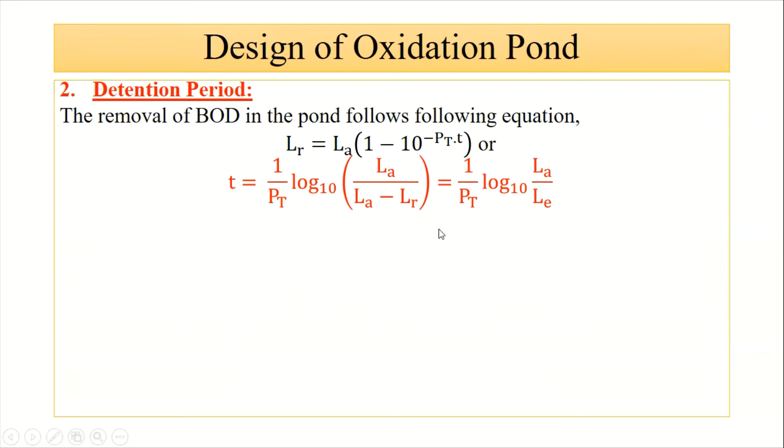So, design of oxidation pond. The second is the detention period. The removal of BOD in the pond follows the following equation. So this is the equation: LR is equal to LA into (1 minus 10 raised to minus PT into T), or T is equal to 1 divided by PT log10 (LA divided by (LA minus LR)), which is equal to 1 divided by PT log10 (LA divided by LE).

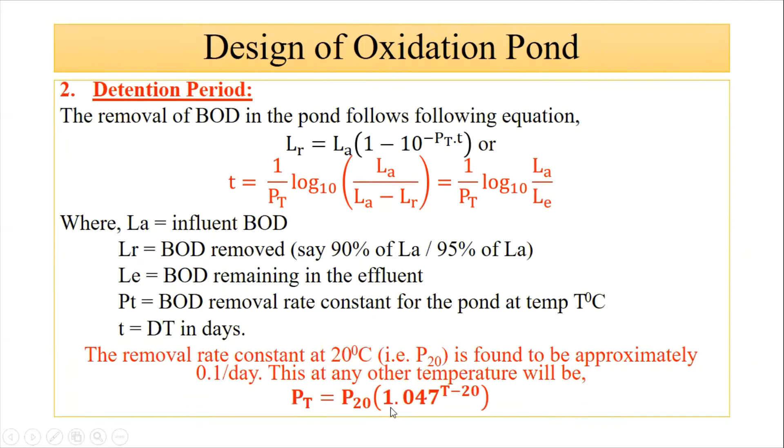Where LA is the influent BOD, LR is the BOD removal, say 90% to 95% of LA, LE is the BOD remaining in the effluent, PT is the BOD removal rate constant for the pond at temperature T degree Celsius, and T is the detention time in days. The removal rate constant at 20 degrees, that is P20, is found to be approximately 0.1 per day. At any other temperature it will follow the formula PT is equal to P20 into 1.047 raised to (T minus 20).

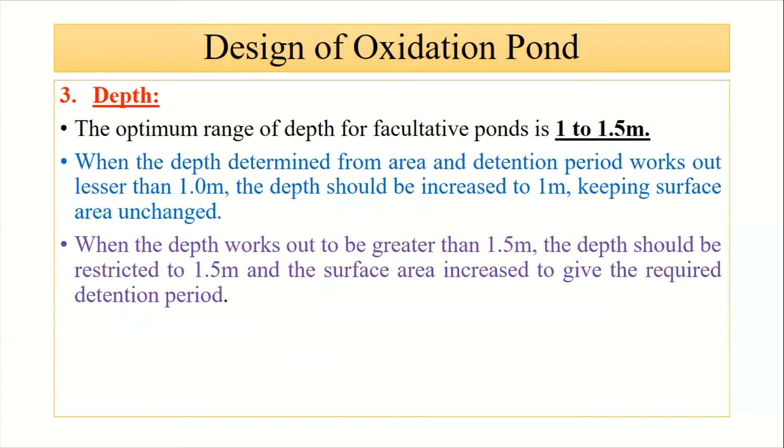So next is the depth. The optimum range of depth for a facultative pond is considered 1 to 1.5 meter. When the depth determined from surface area and detention period works out lesser than 1 meter, the depth should be increased to 1 meter, keeping surface area unchanged. When the depth works out to be greater than 1.5 meter, the depth should be restricted to 1.5 meter and the surface area increased to give the required detention period.

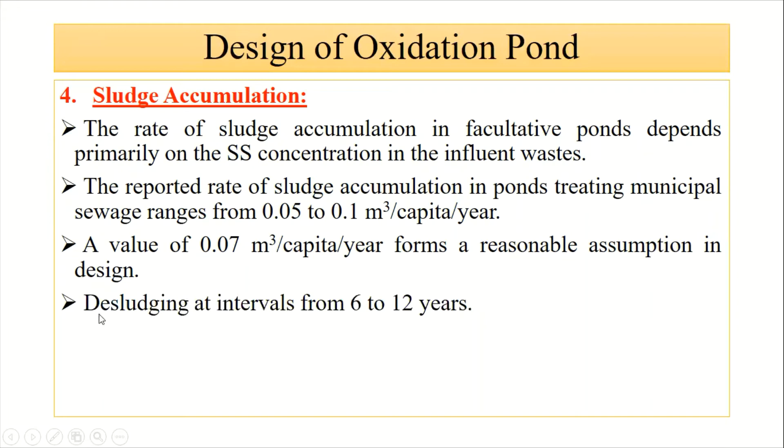Then next, sludge accumulation. The rate of sludge accumulation in a facultative pond depends primarily on the suspended solids concentration in the influent waste. The reported rate of sludge accumulation in ponds treating municipal sewage ranges from 0.05 to 0.1 meter cube per capita per year. A value of 0.07 meter cube per capita per year forms a reasonable assumption in the design, with desludging at intervals from 6 to 12 years.

So next, number of units. Multiple units are required to be provided when the area exceeds 0.5 hectare. These units can be either in series or parallel. A multiple system in parallel provides better distribution of settled solids. Multiple cells in series enable better coliform removal and reduce algae concentration in the effluent.

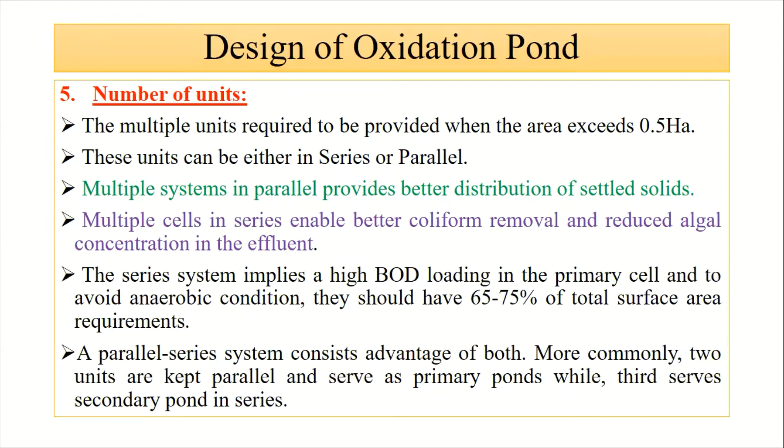The series system implies a high BOD loading in the primary cell, and to avoid anaerobic conditions, it should have 65 to 75% of the total surface area requirement. A parallel-series system combines the advantages of both. More commonly, two units are kept in parallel and serve as primary ponds, while a third serves as a secondary pond in series.

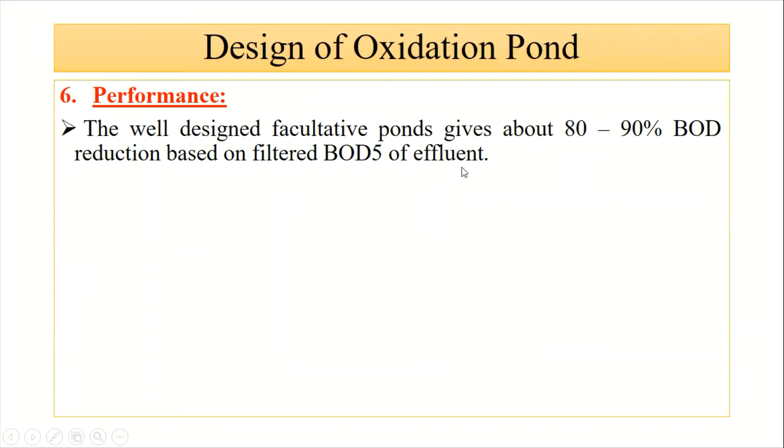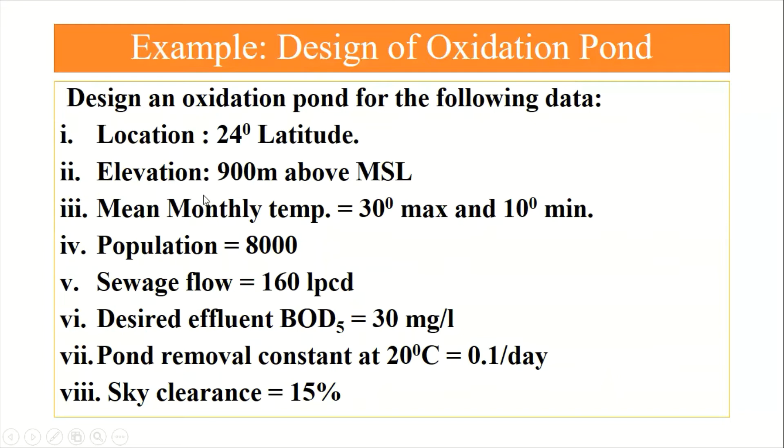Then performance. A well-designed facultative pond gives about 80 to 90% BOD removal based on filtered 5-day BOD of the effluent. So the next point is the design of an oxidation pond for the following data. The data gives location, elevation, mean monthly temperature, population, sewage flow, desired effluent BOD5, and pond removal constant at 20 degrees Celsius equal to 0.1 per day. Sky clearance is 15%. The location is 24 degree latitude, elevation 900 meter above mean sea level.

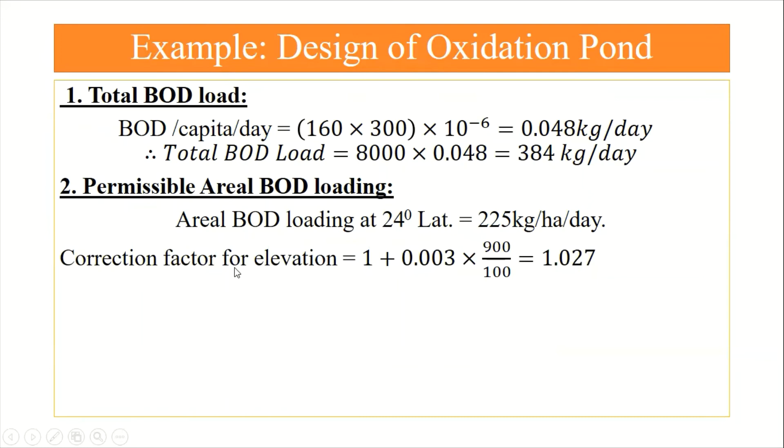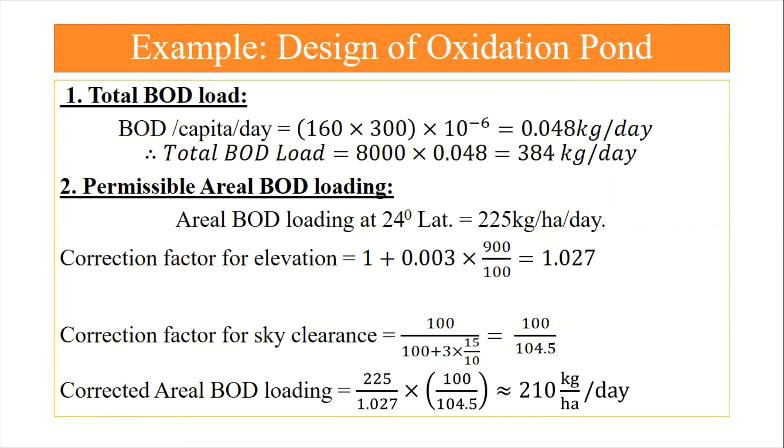Then the correction factor for sky clearance is 100 divided by (100 plus 3 into 15 divided by 10), equal to 100 divided by 104.5. Then the corrected areal BOD loading is 225 divided by 1.027 into 100 divided by 104.5, nearly equal to 210 kg per hectare per day. Then pond area: the pond area is the total applied BOD5 divided by areal BOD loading. The total applied BOD is 384 and areal BOD loading is 210, so nearly 1.83 hectare. Converting into meter square, 1.83 into 10 raised to 4 meter square.

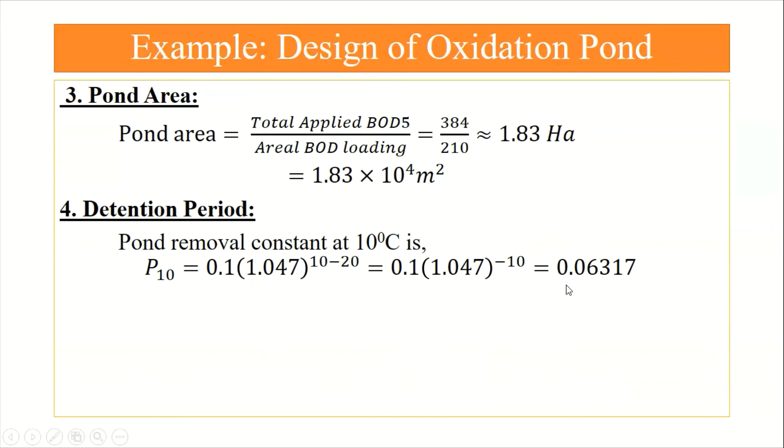Then detention time or detention period. Pond removal constant at 10 degrees Celsius: P10 is equal to 0.1 into 1.047 raised to (10 minus 20), and the value is 0.06317. The detention period is 1 divided by PT log10 (LA divided by LE), where LE is equal to 30. So T is equal to 1 divided by 0.06317 log10 (300 divided by 30). The detention time is 15.85, so nearly 16 days.